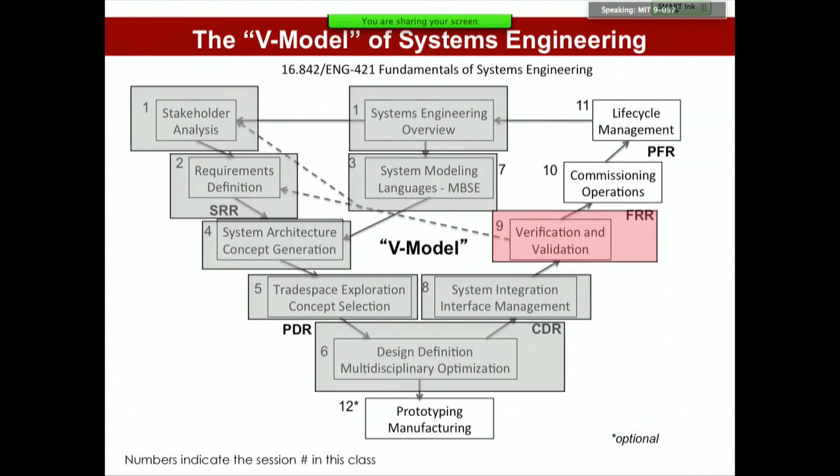And today's topic is V&V, verification and validation. I also want to discuss the FRR as one of the key milestones, the flight readiness review. And if you're not building something that flies, this is sort of your launch to market review. Are you ready to launch your project or product to market?

The outline is we have quite a few things to cover. First of all, I want to drill into verification and validation. What's the difference? What is their role? What's their position in the life cycle? And then we'll spend quite a bit of time on the issue of testing. What kind of testing is done? Why is it done? We'll talk about aircraft testing, flight testing, spacecraft testing, but also some caveats. Testing is not always free of challenges and difficulties.

Then I want to talk about technical risk management, which is often covered in classes on project management, but I think it's essential here as well, as a system engineer, to have a good grasp on technical risk management. So I'll cover the risk matrix, the iron triangle: cost, schedule, scope, and risk. And then I added a small section on system safety, which is a very important topic as well. And we'll finish up with discussing the FRR, the Flight Readiness Review.

So the readings related to this lecture are sections 5.3 and 5.4 in the System Engineering Handbook. And then there's a couple of appendices there, Appendix E and I, that are very, very helpful, and at least one of these I'll mention in the lecture. Plus one of the papers - this is a paper about a decade old, and I know a lot of work has been done on this since then - but this is a paper by Professor Nancy Leveson, who's a colleague of mine here at MIT, who's really an expert in system safety. So the system safety model that she's developed is the subject of that paper.

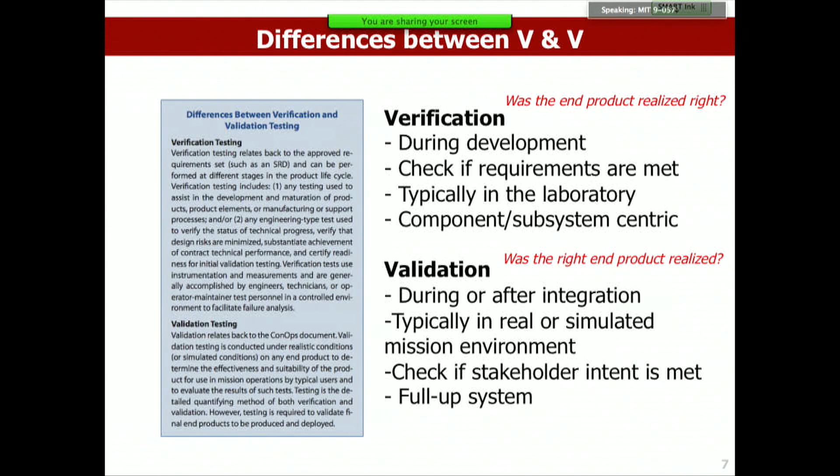So this is something I pulled out from the handbook, which is the differences between verification and validation, and I'm just summarizing this here. So one way to ask is, was the end product realized right? Meaning, did you implement it correctly? So verification is often done during development. So you verify components, subsystems, you check if the requirements are met. Typically, verification is done in a laboratory environment or on a test stand, or some environment that allows you to very carefully control the test conditions. And verification tends to be component and subsystem centric.

And then validation is the question, was the right end product realized? Did you actually build the right thing? Did you deploy the right solution? Validation focuses more on during or after system integration. It's typically done in a real or simulated mission environment. You check if your stakeholder intent is met, and it's often done using the full-up system. It's difficult to do validation on a subsystem basis alone. Typically, validation implies you've got to use the whole system to do it.

Or you basically use dummy subsystems. You replace the actual subsystems you're going to have with something temporary so that you can go back to the stakeholder and give them as close to the real experience as they'll have with the actual system. Okay, so that's essentially the distinction here.

So I want to do a quick concept question on this to see whether this distinction came across. So here's a link, SE9VV, these are all caps. And what I'm listing here is different types of test activities. And I'd like you to check the box whether you think this is verification, whether this is validation, or you're not sure. All right, testing and handling of a new car in snow conditions in Alaska. 90% of you said this is validation, and I would agree with this.

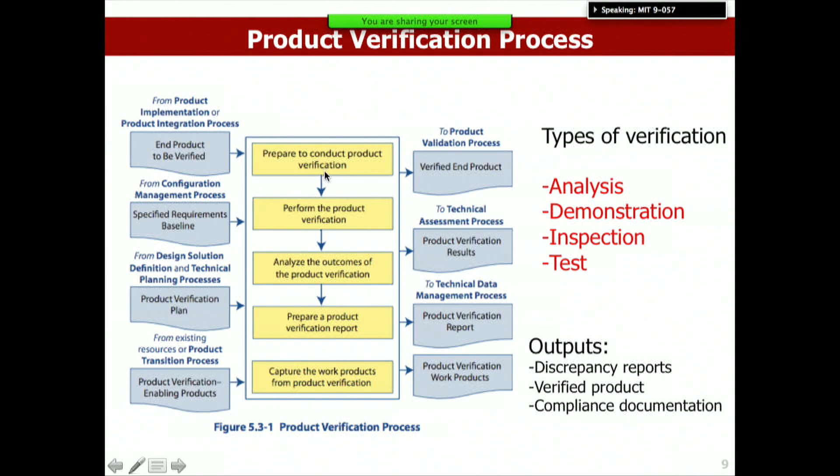So let me just give you a quick example here from my own experience about this verified end product. One of the things on the Swiss F-18 program that we did is not just buy airplanes and equipment, but also models of the airplane itself. In particular, finite element models, very detailed finite element models of the structure. And these models were very expensive. Like some of these models were millions of dollars.

And so I got a phone call. I was a liaison engineer at the time in St. Louis. I got a phone call from Switzerland saying, this is crazy. How can we be charged millions of dollars for this particular set of models? And I said, yeah, that seems pretty expensive. So I'm going to go negotiate this. And so I started negotiating, and I guess either I'm a bad negotiator or it was really, really clear why these were so expensive.

The reason these models were so expensive is because they were on the right side, not on the left side. So every one of these models that we were purchasing had been verified using actual physical tests. So every location was guaranteed under the load conditions to produce a stress and strain prediction at that location that was guaranteed to be correct within plus or minus 5%.

So the model had been very carefully calibrated and tuned against physical reality, as opposed to a finite element model that's just, anybody can make a model and put some load cases and boundary conditions on, and you don't know how closely does this mirror. So there's a huge difference in value between a model that has gone through verification, where at the end of it, there's actually a report, there's a protocol, there's data that says all these requirements that you had against it have actually been checked. This is a certified product.

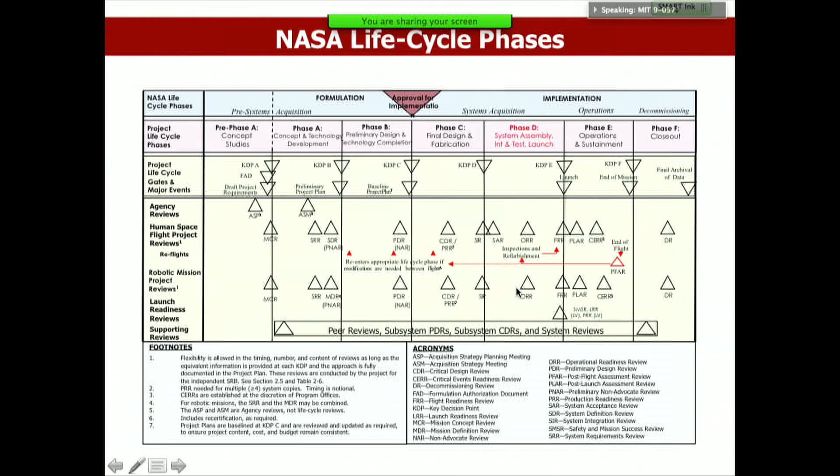Okay, so in terms of the life cycle phases, where this fits in, most of this activity happens during phase D. You remember this was the NASA life cycle model, and phase D is system assembly, integration, test, and launch. So much of the testing that we talked about happens during phase D. The system has been fully designed, it's been assembled, it's been integrated the way we talked about last week, and now you're really putting this system through its paces.

And so phase D is intense, it's expensive, and if something goes wrong, it sort of sends you back to the drawing board often, and you have to figure out whether a failed test, a failed verification, is a showstopper, right? If it is, then you have to redesign the system, you have to retest.

But if it's a minor thing, then you might be able to request a waiver, and you can say, okay, we didn't achieve this requirement, or we failed this test, but we think it's a minor issue, and instead of holding up the program, we're going to get a waiver for it, which means you get an exemption essentially, and you can move on. And whether or not a waiver can be granted is a big deal, and that goes under risk management, which we'll talk about in a few minutes.

Yes? I have a question. If you're a system integrator and you created some statements of work for other people to, say, procure a large optic, they go and build that mirror to your requirements, do all their verification and testing, and provide all that documentation. And from my experience with procurements, that comes back in-house, and you go to assemble it, and you essentially do a lot of that verification and testing again to double check that supplier.

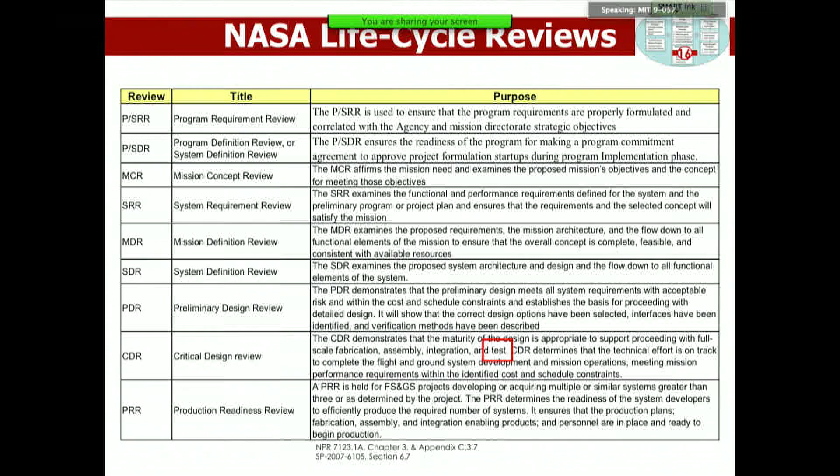Okay, so what I did here is search for the word test in the list of milestones. The first time it really comes up in a major fashion is at the CDR. The CDR demonstrates the maturity of the design and is appropriate to support proceeding with full-scale fabrication, assembly, integration, and test. So even though at the CDR you're blessing the final design, you should say something about how the testing will be done. In fact, test planning often is way before the CDR, but at the CDR you should really talk about the testing.

Then we have a so-called TRR, which is a test readiness review. For each major test, you would have a separate TRR. The TRR ensures that the test article, hardware, software, the facilities, the support personnel, and the test procedures are ready for testing, data acquisition, reduction, meaning data post-processing, and control.

And then at the system acceptance review, the SAR, that's when you essentially transfer the ownership of the asset, right? And it's at the SAR that you're going to review not just the product and its documentation, but all the test data and the analyses that support verification.

So at CDR, you say this is the testing we'll do. At the test review itself, you say everything is ready for the tests to happen, and then you do them. And at the system acceptance review, you look backwards and you say what tests actually happened, what's the documentation, what were the results. Are we ready to own the asset now? Does that make sense? Okay.

Okay, so with that in mind, let's talk about testing itself, what kind of testing there are. Testing is one of the 4 methods of verification, and it's the one that we often spend the most money on. So this is from the handbook, section 5.3. This is basically an alphabetic list of the kind of testing that we typically do. I'll just highlight a few here, and then I have a group exercise for you.

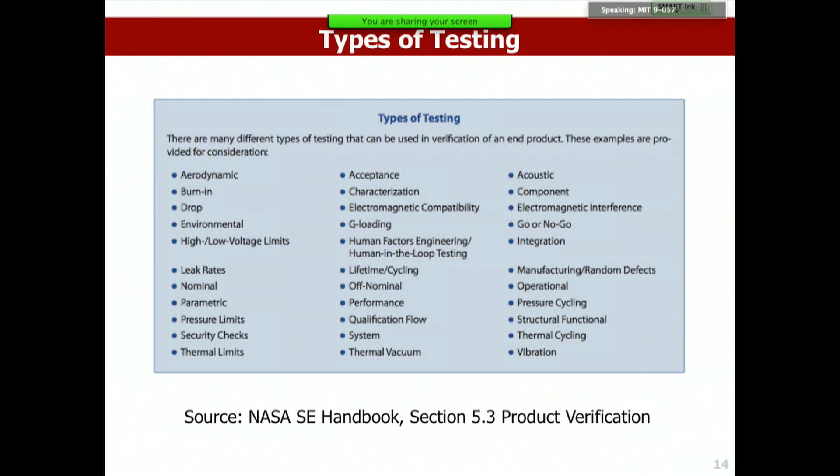So this is 20 or 30 types of testing, and then within each there's even subtypes. There's a whole industry actually that is primarily focused on providing test equipment, sensors, data logging equipment. It's a big industry, not just in aerospace, but throughout.

Okay, so I'd like to do a little turn to your partner exercise, and the question is, what kind of testing have you been involved in the past? If this was in product design, product development, that's fine. If it was for an internship, or even at the university itself, if you did some experimental testing as part of research, that's fine too. You can talk about that too.

So what kind of testing have you been involved in the past? What was the purpose of the testing? What were the challenges? What went well? What were the results? Maybe if it didn't go well, talk about that too. All right, good. So we're going to go back and forth. Who wants to start here at MIT? Who has a good story to tell?

Go ahead. So I worked on the ground station side of the Lunar Laser Communication Demonstration Program that recently flew. I was involved in assembly and integration, but also doing verification testing in the lab and at our field site. Then we did validation when we moved out to the field site in New Mexico. So I was involved in the whole process, and it's neat to see. We had to go into the clean room a few times to adjust the optics because we saw that they weren't meeting requirements.

Is there the reflector that was left by the astronauts? Are you using the reflector that was left on the surface? No, we were using just Zygo, optical alignment stuff in the lab. And then when we were out at the field site, we were utilizing guide stars to align the optics. So what went well? Was there a big difference between indoor and outdoor? What surprised you in these tests?

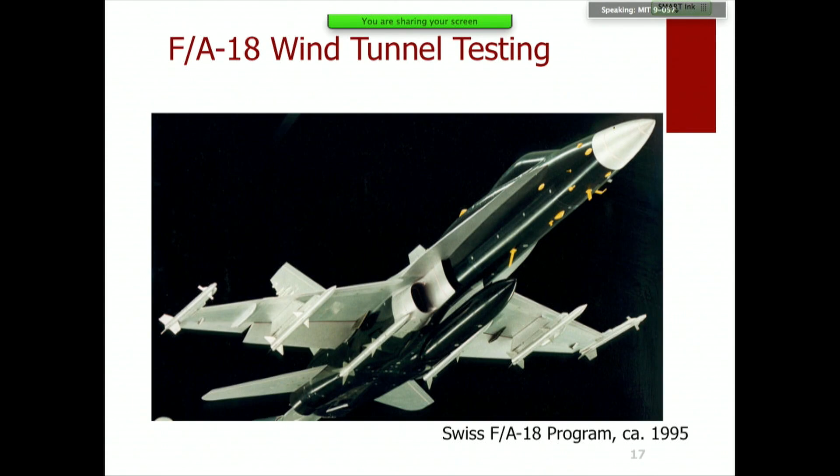This is a wind tunnel test model. This is a model that was developed as part of the F-18 program. This is about 1995 vintage. It's a subsonic wind tunnel model, and you can see in yellow you have all these probes and radomes and things like this. So it's basically to check whether any modifications you make to the airplane will affect its performance in airflow. This model, by the way, just building this model is about $500,000. It's very accurate, it's very precise.

Yes, go ahead. Is that model full scale or half scale? No, it's, I want to say like 1/8 scale, something like this, yeah.

Okay, here's the hush house that I was talking about. This is in St. Louis. So you can see that the airplane is not painted yet, and only one engine at a time. So the engine is, in this case, at full afterburner. You can see the airplane itself is secured with these chocks here, and there's load cells in these chocks. So as you fire up the engine, you can measure the thrust by the load cells that are attached to these

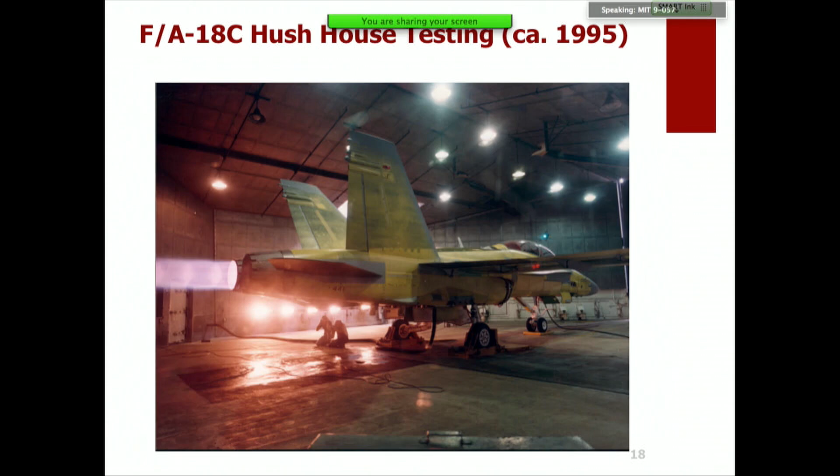chocks here. You also see that there's these cables running in and out of the airplane for all the sensors, and the engine is put through its full different operating profiles, and a lot of sensor data is recorded to make sure that the engine responds appropriately. It has the right thrust for the right throttle setting, the fuel consumption, all the temperatures in the engine, that everything is nominal, essentially.

You have to reserve months and sometimes years ahead. If you want to do a live fire test campaign, you have to reserve the range at least 18 months to 2 years ahead of time, because a lot of other services, a lot of other programs are using the same facilities.

In Europe it's a little harder, definitely in Switzerland, because the country is so small and dense and highly populated. You can't test live missiles in Switzerland. You can do guns, air to ground, but in order to do missile testing, that's typically done here in the US or in a more limited fashion in Scandinavia, like in northern Sweden, where there are some test ranges.

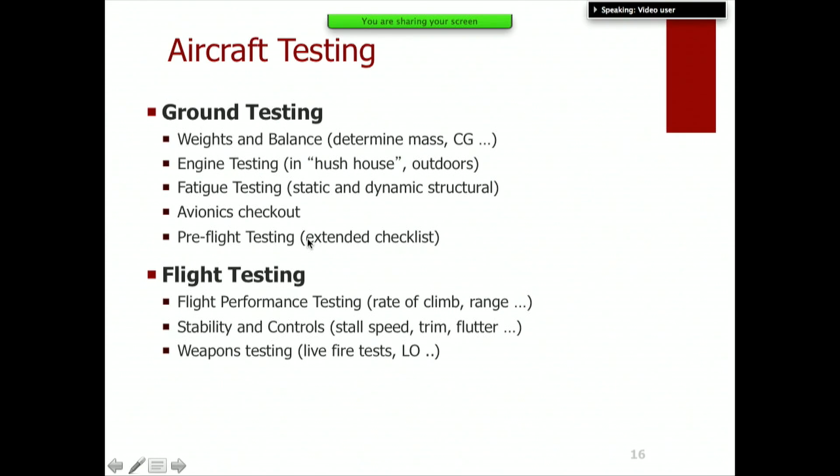So that's where this ground testing, pre-flight testing becomes very important. So basically you taxi for many hours, all the flight control surfaces, all the engine, the hush house testing. So you essentially try to do as much as you can on the ground before you do the maiden flight. All right, let's move to spacecraft.

And it's kind of a similar thing. You can distinguish the ground testing versus on-orbit testing. So the ground testing is really not that different. Weights and balance. The biggest thing is if your satellite is heavier than the launch capability of the launcher, you have a real problem. So the mass constraint is even tighter in spacecraft.

Then a lot of testing on antenna and communications. This is typically done in anechoic chambers in the near field, and then later in the far field. Vibration testing, that's the shake part. Thermal and vacuum chamber testing, that's the bake part. And then you also have pre-launch testing, so off-pad and on-pad.

Off-pad testing is the satellite or the spacecraft has already been shipped to the launch site, and it's hooked up, like a patient in the hospital, to a lot of cables and power and cooling and so forth. And then when it's on the pad, it's pretty limited. So on the pad means the satellite or the spacecraft is already integrated into the launch vehicle. It's on the launch pad, and then the amount of testing you can do is very limited.

So off-pad, on-pad is: has the spacecraft already been integrated on the launcher or not? Once you launch to orbit, you got your 8 minutes of terror, and hopefully the launch goes well and the spacecraft is released into its initial target orbit. And then you do a lot of other tests like thruster testing. Can you do station keeping? Can you turn on and off the thrusters? You deploy all of your mechanisms, your antennas, your scientific instruments, and then your communication and instruments.

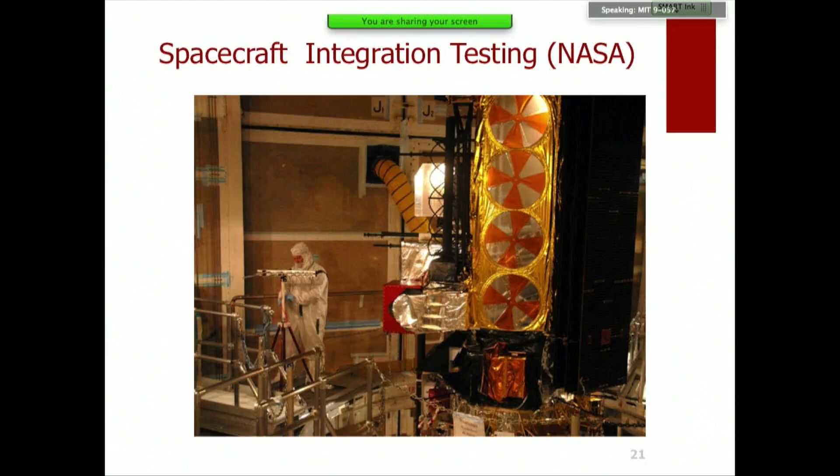Some pictures. So this is what typical spacecraft integration testing looks like. So this is in a clean room environment. You have people in bunny suits, and the idea is to not damage the spacecraft while you're doing the testing. This is a picture of the Clementine spacecraft.

This is one of the failure modes, is that you have high electrostatic charges that build up on a spacecraft, create a large voltage potential across the spacecraft. Some spacecraft have failed because of that. So all of these things you want to test in a very controlled environment.

James Webb Space Telescope. I'll send you a link through email. There's a simulation of this on-orbit deployment. It truly is amazing. This spacecraft will be launched in a box essentially, and the deployment sequence is very carefully choreographed. First, typically, you deploy your solar panels, right?

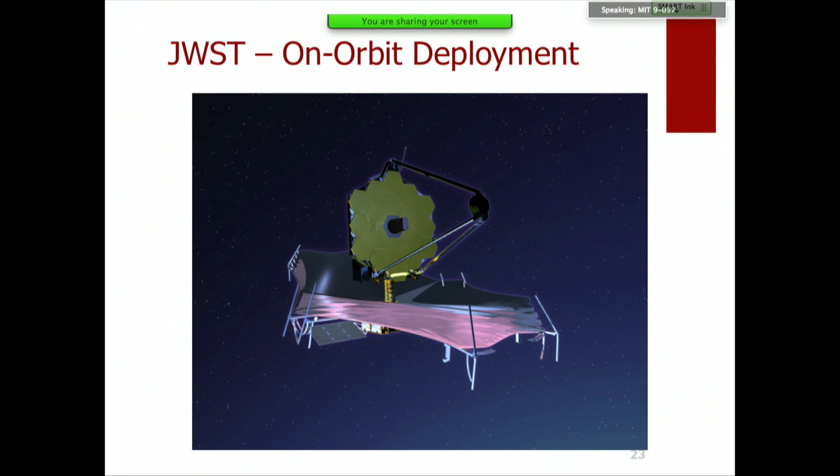Because you need power, because you're only running on battery initially. So if your battery runs out before you've had a chance to deploy your solar panels and get fresh power into it, you're in big trouble. So typically solar panels first, then communications, and then you start deploying the other subsystems.

So for James Webb, also very tricky is this, it's called the sun shield. It's essentially thin layers of insulation, and the geometry is very important. The primary mirror, the secondary mirror, all these things need to be deployed with very, very high precision. And it's even to the point where this particular spacecraft is so lightweight that it cannot support its own weight in a 1G gravity field.

So there's no way to test end-to-end the full deployment sequence on Earth. The first time it will happen is in orbit. Now, they've tested subsequences or scaled models. For example, the Sun Shield has actually been deployed at a smaller scale in a 1G field, but never the full thing. So this will be kind of scary after an $8 billion investment. Let's hope for the best, 2018.

Testing is good, but testing also has its caveats. Caveat means limitations, essentially. Testing is critical, but it's very expensive. Think about test rigs, test chambers, sensors, DAQ as data acquisition equipment. All this stuff is very expensive. And if you can reuse things between different programs, that helps, but still.

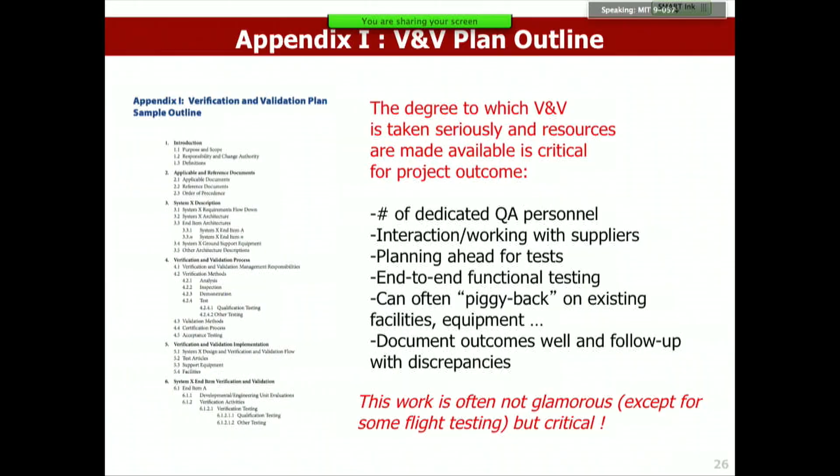It's not really a question, but I wanted to say that also flight testing is not so fancy. I mean, many people think it is, but it's actually a lot more. Well, the actual flight, maybe it's fun, but there are not that many. You need to prepare them weeks and weeks ahead. And it's actually very, very boring because you need to make sure that you don't waste time at all. At least you can waste a little bit more time in a lab. So it's very stressing and not so funny.

Do you have experience with this? I wasn't flying because you need to be certified, but I was preparing some, and I think it's even worse than testing in the lab. Yeah, yeah. Which airplane or which system were you involved with? A330. I was in there with the power plant system. Okay. FADEC in particular, and the aircraft was an A330.

A330. Okay. Great. But you know, I think it's healthy to have this experience. It really makes you humble. And you also see, for the things in design, did you design well? Did you design for testability? I highly recommend for every one of you to try to get on some kind of test campaign at least once in your career because it's eye-opening. So thank you for that comment.

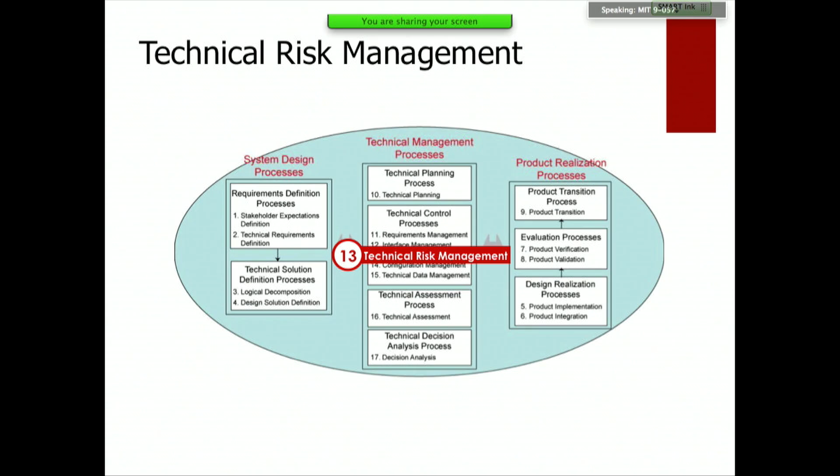So let me talk about risk management. This is actually quite prominent in the Systems Engineering Handbook. It's right in the middle of your systems engineering engine, Technical Risk Management, Section 13. Why is it important? First of all, what is risk? Risk is the probability that a program or project will experience some undesired effect or event, and the consequences, impact, or severity of that undesired event should it occur.

So think of risk as the product of probability times impact. And the undesired events could come from a number of things: technical, programmatic, so cost overruns, schedule slippage, safety mishaps, health problems, malicious activities, right?

Cybersecurity is a big thing these days, environmental impact, failure to achieve the scientific or technological objectives or success criteria. And so technical risk management is therefore an organized, systematic, risk-informed activity centered around decision-making to proactively identify, analyze, plan, track, control, communicate risks, and to increase the likelihood of success of a program.

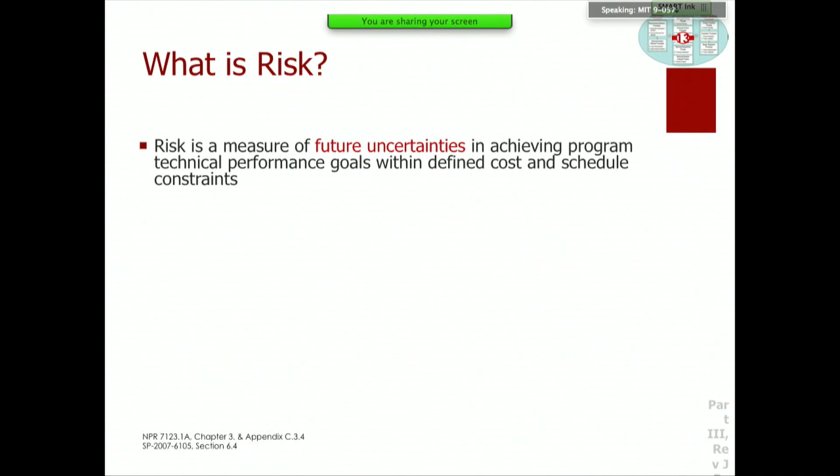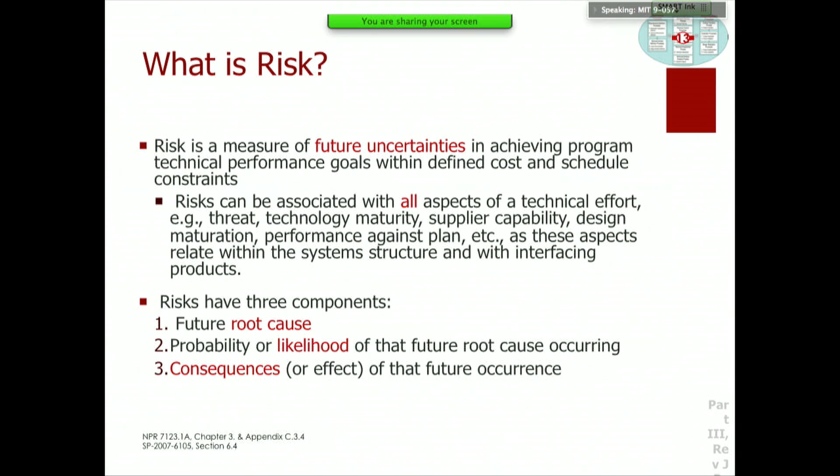And so what risk really does is measure the future uncertainties of achieving your goals, your program goals, technical, cost, schedule goals, and think of risks in a sort of holistic way, all aspects of the technical effort, technology maturity, supplier capabilities, performing against plan, and so forth. And so the idea of risks is that risks have some root cause, there's something that gives rise to risks, and then the actual quantification of risks happens in terms of likelihood and consequences, which are kept separate dimensions.

So the first thing to think about is, where do risks come from, right? Where's the source of risks? And I want to show you a couple of models for thinking about this. The first one is this idea of layers of risk. And I want to credit one of my colleagues here at MIT, Don Lessard from the Sloan School, who really developed this layer of risk model and applied it to different industries. So there's a version of this for the oil and gas industry. You could make a version for medical technologies. So this is the version for Mars missions.

Okay, so if you're designing a new Mars mission, a new Mars rover. So you have in the bullseye here, the narrow interpretation is technical or project risk. So the airbag technology, if you're using airbags for deployment, will it work? The rover motor performance, are you going to have software bugs? Those are the risks we typically think about. And the idea is you have high influence over these risks as a system engineer, as a project manager.

Then you have a layer around it, which we call industry or competitive risks. Will your contractors perform? Will you have budget stability? And then there's more country and fiscal risks. So in the US, we have a budget cycle. We have 4-year administrations. Will you get your budget? What are the priorities between human and robotic space exploration, and then working with international partners?

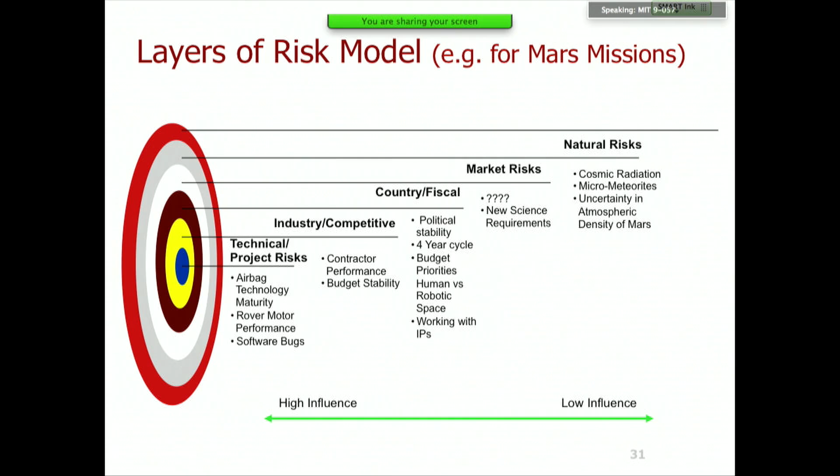And then finally, the most outer risk is what we call natural risk. So this would be things like cosmic radiation, micrometeorites, uncertainties in the atmospheric density of Mars as you're doing entry, descent, and landing. And you have very low influence, right? That doesn't mean you can't protect yourself or take measures to deal with these risks, but fundamentally the occurrence or the probability is something you can't really do much about. So that's one way to think about risks, and the seeds of risks are in these layers. I know this is very high level, but I find this to be a pretty useful model. Yeah, go ahead.

So this just references the influence you have, not necessarily the amount that each of these are a risk to the program? That's correct. That will be program specific. The stuff that's in the bullseye here, you can do a lot about it, perhaps both in terms of probability and impact. And then as you move further out, there's less and less influence you have as a system engineer, as a project manager.

Here's another way to organize your thinking around risks, and this is around the iron triangle in project management. We talk about the iron triangle of cost, schedule, and scope, and we call it iron because the idea is that if you constrain all three too tightly, it can be very difficult. And it's also referred to as the triple constraint in project management. So the three dimensions here are technical risks, cost risks, and schedule risk.

And then in the center we have programmatic risk, which means it's kind of the combination of all three, and the idea that even if you do a great job on keeping your budget under control, schedule, and you're meeting your technical objectives, you can still fail because the program as a whole isn't doing the right thing, or the market that you had been targeting is no longer really attractive by the time you launch.

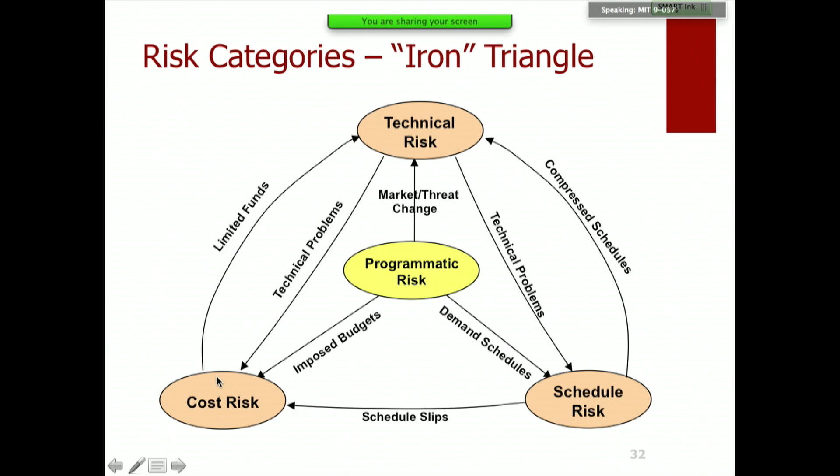The key idea here is that these risk categories are not independent of each other. So let me mention a couple of examples. So cost risk might limit your funds, and that could in itself induce technical problems, which cause you further cost risk. So one of the big initiatives at NASA in the 90s was the Faster, Better, Cheaper program, right? We're going to launch more missions, cheaper, and out of 10 missions, maybe 2 or 3 will fail, and then 7 will succeed, but we'll get more value out of this as a portfolio.

Unfortunately, it didn't work very well because when the 1, 2, or 3 missions fail out of your portfolio, the media and the public focuses on the failures rather than the aggregate value of the whole portfolio. And eventually, that's probably the main reason why Faster, Better, Cheaper was abandoned. But so for example, we just talked about testing. If you have a very limited budget, what is the first thing people typically cut out? What's the first thing to go? Testing. Testing is very important.

Sam asked me during the break, what's your typical budget for testing and V&V activities? And in many programs, it's very substantial. Maybe 30, 40% of the budget, easily. And so you start cutting out tests. Well, what you do is you introduce technical risk. And if you have failures because you didn't test, that could cause you additional rework and more cost.

Similarly, schedule slips can induce cost risk. So as you slow down, you have what's known as the standing army cost, right? People are going to charge to your program even if it's at a reduced level. And that will also increase your cost. So lots of coupling here between risk categories.

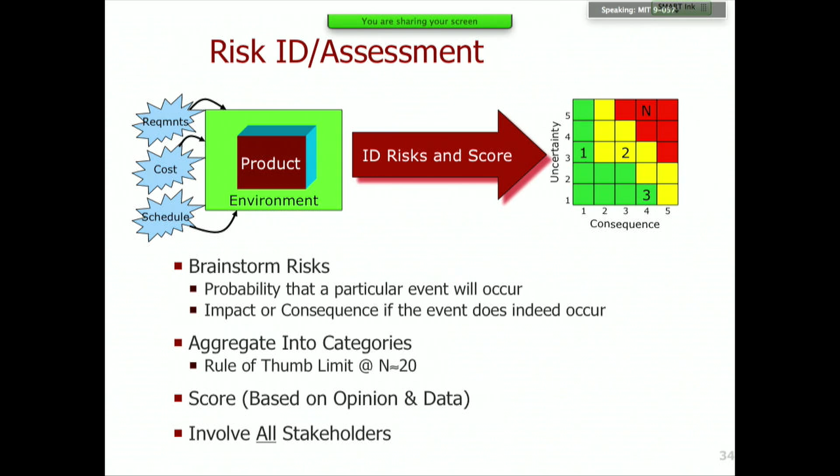And this is where actually having a mix of younger engineers and more experienced engineers really comes in handy. The experienced engineers, they will have been through several programs. They will have seen failures in the past. They will really be able to point to potential risks that less experienced people may ignore or just not understand how important they could be. So the next step then is to aggregate these into categories, typically not more than 20 or so categories or risk items.

Projects often keep so-called risk registers, which is just a database or a list of risks. If you have hundreds and hundreds of risks in the risk register, it's too much. It's just a long list, and it's just a check the box exercise. To really take risk management seriously, you have to focus on few of the risks that you think are important. You score them based on a combination of opinions and data, and you try to involve all the stakeholders in the risk management. And eventually, risks are placed on this matrix of uncertainty and consequence.

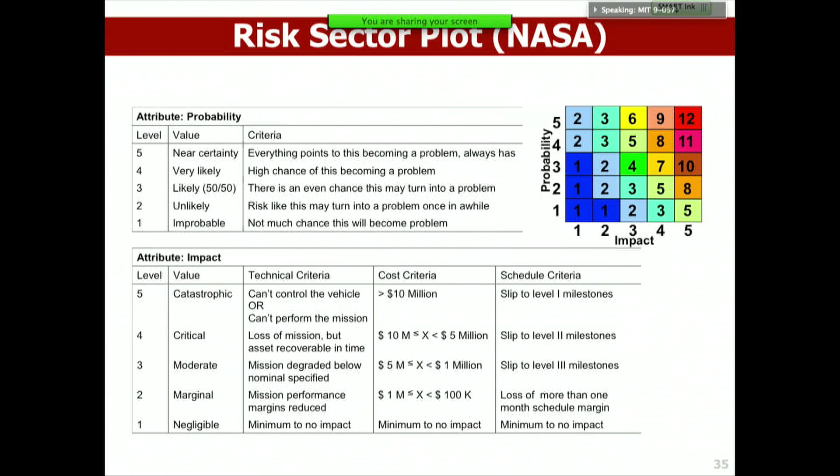And then schedule. So a level 1 milestone would, for example, be launch, right? A good example of this was the Mars Science Laboratory, the Curiosity mission. Originally, it was supposed to launch in 2009. They missed that deadline mainly due to problems with cryogenic actuators. The actuators took a lot of the blame, but there were a lot of problems across the board. They missed that launch window, and they had to launch in 2011. So that was considered, from a programmatic standpoint, a level 5 failure because you missed your main launch window, and you had to wait 26 months for the next one.

So that's good because now, when you assign a probability and impact, you can really look at these criteria, and it's easier to do that in a sort of repeatable fashion. The other thing is, if you look at the colors on the matrix, you can see it goes from 1, blue, which means low risk, to 12, which is the highest risk. So there's 12 risk levels. But when you look at the matrix, there's something peculiar about it. So look closely at the colors, and you'll see something special about this matrix. Anybody notice what I'm talking about? Let's see at EPFL. Do you guys, when you look at those colors at the matrix, do you notice something?

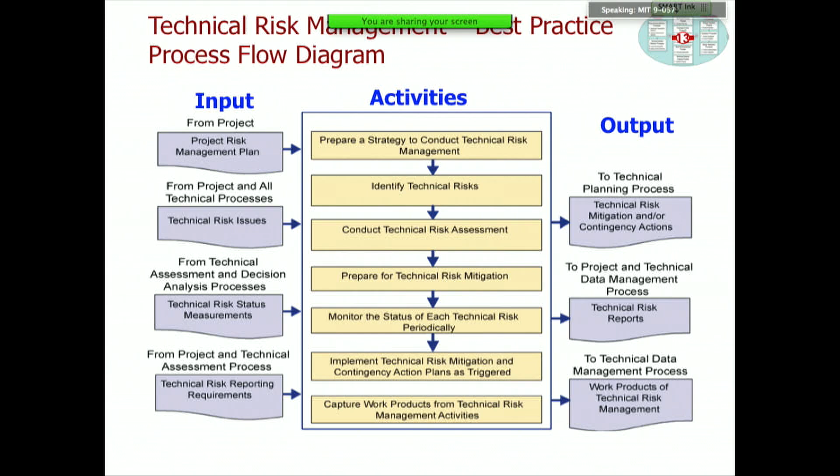This is again a flow diagram for how to do this risk management properly. You have a risk management plan, your technical risk issues that are placed on the matrix, any measurements or data you have, and then how do you report this, and then out of it comes a mitigation plan, a set of actions, technical risk reports, and then any work products from the technical risk management. And the idea is that you repeat this process on a regular basis. And it's a big part of your milestone reviews as well.

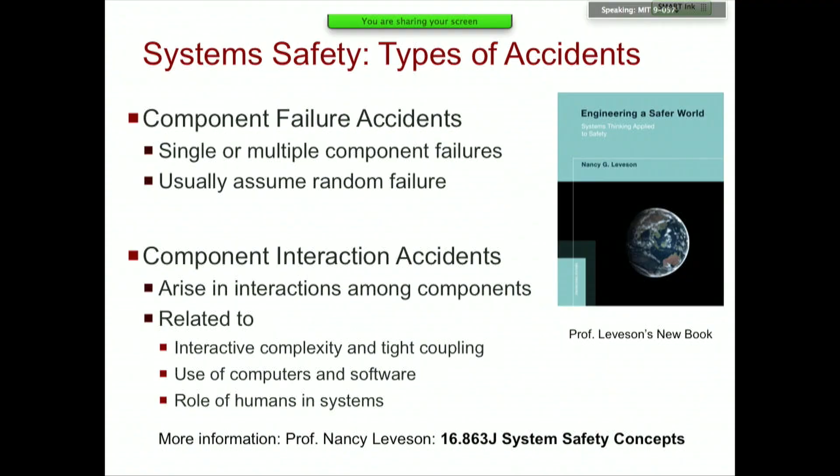Okay, so I'd like to spend a few minutes on system safety. I am not going to do this justice because there's a whole class here at MIT on this taught by Professor Nancy Leveson. By the way, who's taken that class or been thinking about taking it? About 3 or 4 of you. So I'm just going to give you a very quick exposure to this.

This is a book that Professor Leveson wrote several years ago, and she basically distinguishes two kinds of failures. Component failures, which most people think about, an axle broke, or the battery caught fire. Clearly component failures are real and they happen, single or multiple component failures, and usually there's some randomness to them. So most of the classic accident investigation techniques and safety techniques focus on component failures.

But there's also component interaction accidents or failures, which are trickier in a sense because you could have a system where no single component has failed, and yet you had a system failure. So it's the interactions among components. And this could be related to interactive complexity and coupling, more and more computers and software, and then the role of humans in systems. This is really what a lot of this is about.

So the traditional safety thinking is that you only need to worry about component failures, right? Here's a classic example of a sequence of events. This is for a tank failure. So in this case, we have a tank, and there's...

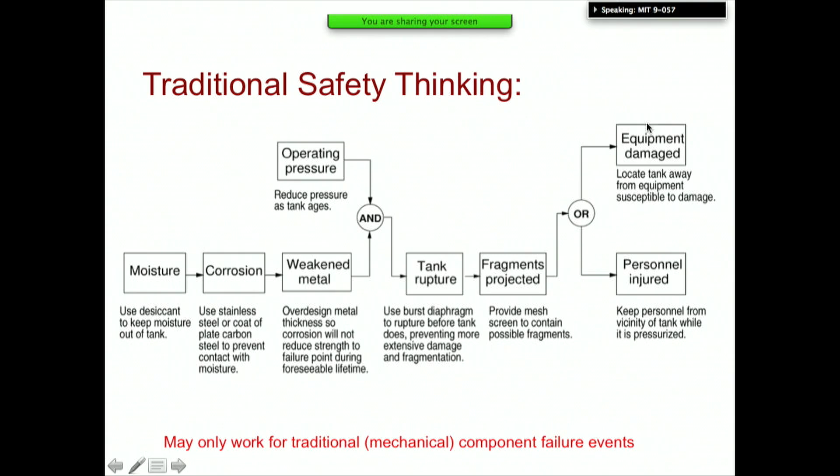moisture that builds up in the tank, and then corrosion essentially is a result. The metal gets weakened, and under the operating pressure of the tank, the tank itself has been weakened due to corrosion. The operating pressure causes a tank rupture, and the tank rupture then causes essentially an explosion, and fragments or shrapnel from the tank will be projected and then cause equipment damage or personnel injury.

And so in this kind of linear chain of events model, the way you think about safety is putting in barriers. This is often also referred to as the Swiss cheese model, right?

If you take layers of Swiss cheese, and I guess it has to be Emmentaler, right? You guys know the Emmentaler at EPFL, right? Emmentaler is the one with the big holes. So you take these slices of cheese, and if you look at the cheese and there's actually a hole right through, then the accident can happen. But if you put another barrier in between, you can't see through the cheese and the accident is prevented.

That's sort of the classical thinking around system safety: chain of events, and then put barriers between these. This is, I think, valid for a very particular kind of accident, which are these component accidents.

What Professor Leveson says in her STAMP and STPA framework is a little different. This is based on essentially thinking about safety as a lack of control of a system, lack of controllability of a system. And so if you think about it this way, I'm showing you here a control loop, and you have the actual system, the actual process that you're executing. The controlled process is here. You're sensing things about that process, like temperature, pressure, proper alignment.

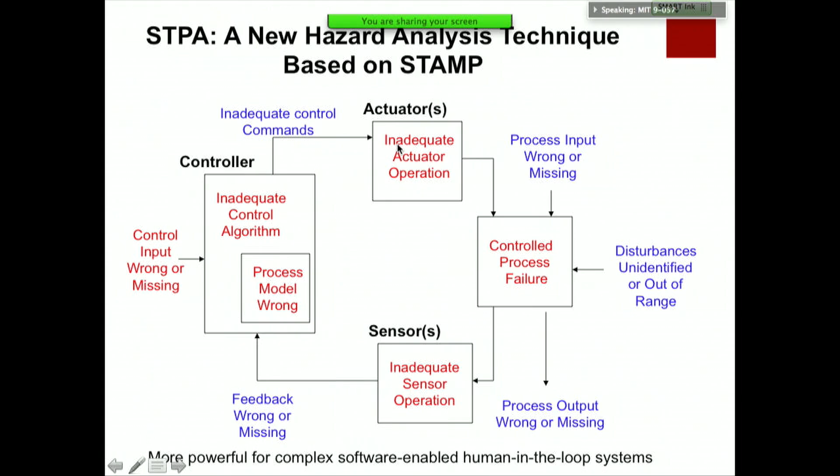And so one problem could be your sensors are inadequate, you're sensing the wrong information. And then here's your controller model: how should you control the system? So you have the wrong controller or the wrong process model. And then here's your actuators: are you issuing commands at the right time? Are you issuing the right commands, or are you not issuing commands when you should be to the system?

And that feeds back into the control process itself. Process inputs could be wrong or missing. You could have disturbances into the process that are unidentified or out of range. And then eventually, if this process goes unstable, then you have a failure or an accident. So it's quite different. It's essentially thinking of this as a control problem instead of a chain of events problem.

And the argument here is that for safety or failures that involve a combination of hardware, software, and humans, often this model is able to be more complete in terms of identifying hazards and potential mitigation actions.

So I think we're out of time, but I want to give this to you as homework for thinking about this. This is an accident that happened earlier this year, in October. This is the Virgin Galactic crash that happened. Virgin Galactic is one of the space tourism companies.

And during a test flight, the airplane crashed because the co-pilot unlocked the feather system. So it has a kind of feathering mechanism, and the co-pilot unlocked it too early during a kind of high-speed flight phase. And so what I'd like you to do, the link is here. Just read the story. There's a more lengthy accident report that's come out. I'd like you to just read this quickly and then think about, how does this relate to risks? How does it relate to this particular model of system safety?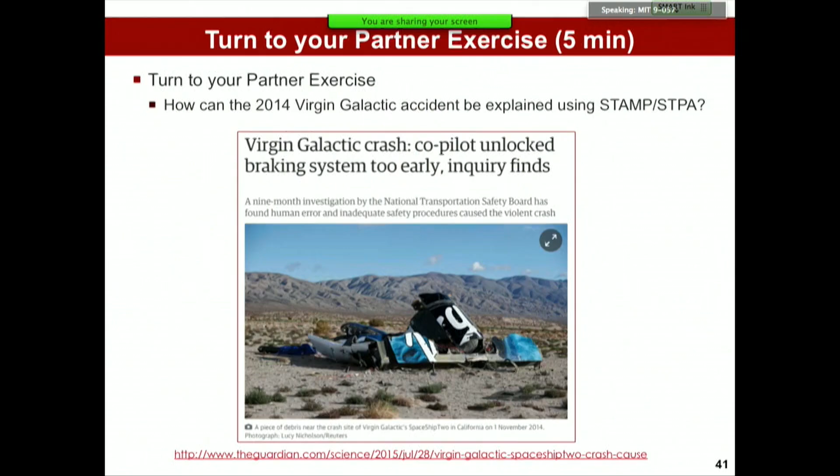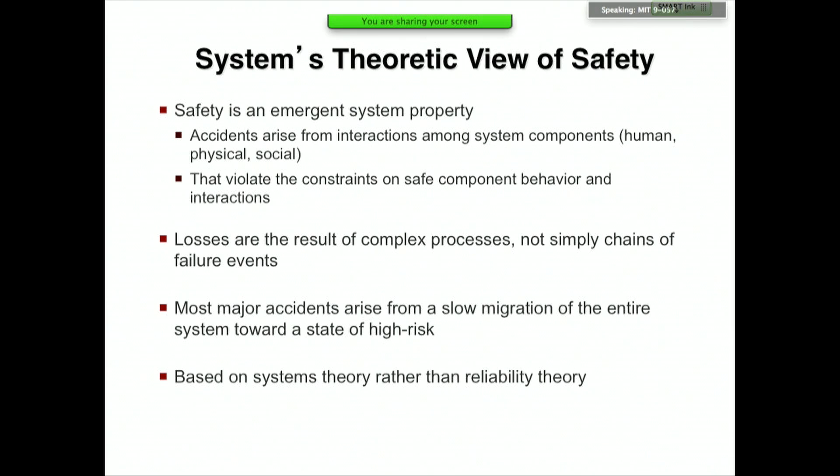Okay? So the systems theoretic view of safety is then that safety is an emergent system property. Accidents arise from interactions among system components, physical, human, social, constraint violation. Losses are the result of complex processes, not a simple chain of events, and most accidents arise from, you could have a system that's quite safe when you start operating it, but over time it migrates to an unsafe state because sensors fail, people start bypassing safety procedures, and gradually it migrates to high risk.

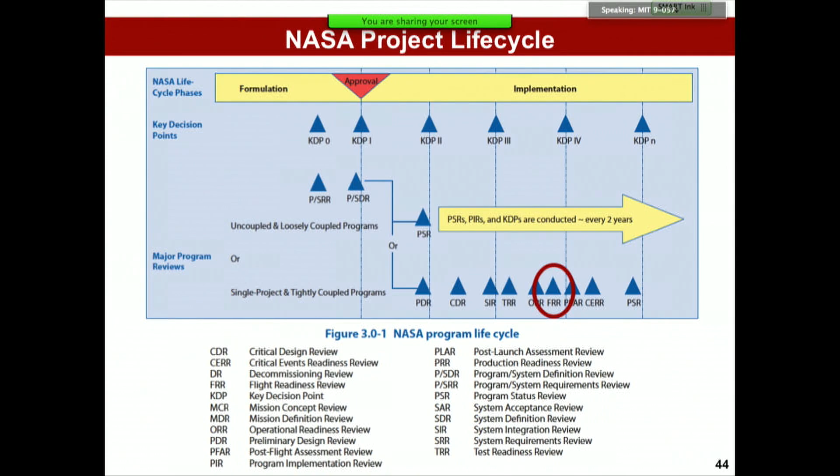Okay, so the last thing I want to talk about just for a minute or two is the FRR, the Flight Readiness Review, which is one of the later milestones. And what happens at the FRR? It's essentially your last chance to raise a red flag, right? This is the last milestone before launch. Have all the V&V activities been passed successfully? Are there any waivers that need to be granted? What are the residual risks we just talked about?

And then, after the FRR is passed, you actually start the countdown, right? T minus X days, Y hours, Z seconds to an actual launch or a product launch, whatever it is. And then here's from the handbook, the entrance and success criteria for FRR. So everything should have been done at this point. Your design, your integration, your testing, your operating procedure, your people should be trained, this is your last chance to raise a red flag. After the FRR, you essentially go for launch. So the stakes are high.

Okay, so quick summary. Verification and validation are critical. There's a distinction between the two, right? Verification is against the requirements as written. Validation is you go back to your customer and you test in a real environment. Testing, many different kinds of testing. It's fundamentally a QA activity, and it's really expensive, but it needs to be done right. Risk management, we have different tools like the risk matrix, risk identification, mitigation, and that's really where the rubber meets the road in terms of the tension between cost, scope, schedule, and risk in projects.

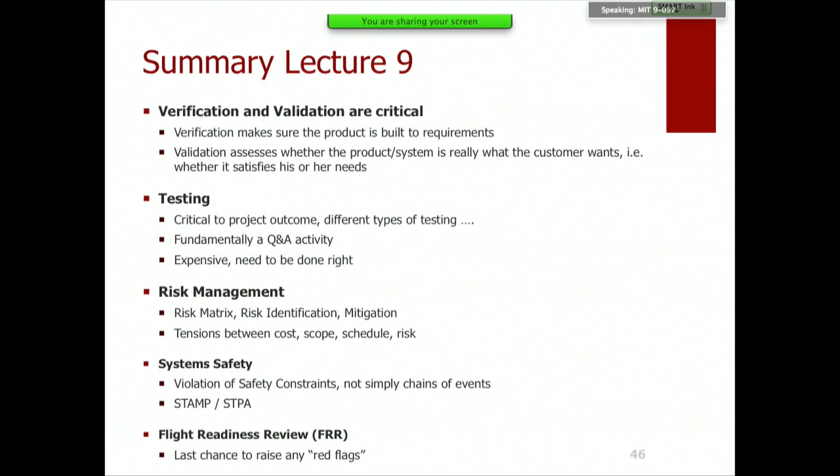EPFL? Yes, please go ahead. So after the FRR, you should have finished your tests, right? Yes, you should have finished your tests except for the ones that you're going to do, say, on orbit, right? Because I was wondering, in the list there is the go/no-go test, and I'm wondering if it's not related to the launch, actually. Yeah, so the actual launch countdown, you can stop the launch if certain things don't work, so this is a review. The FRR is more like a CDR, the countdown hasn't actually started yet, but if you successfully pass the FRR, that's when the official countdown starts. And then you still have a possibility, of course, of stopping the launch. But in terms of a formal programmatic review, this is your last chance.

I think the point here is more about what is your system boundary. If you consider the system boundary being the whole mission, including the launch, then obviously the system will only be finished when the mission is finished, phase E/F. Right. And this FRR, flight readiness review, is linked to the payload or to the whole satellite, specifically that you're allowed to go forward and now start the countdown, and then all the other things. Now, if you extend the mission boundaries to the whole space program or to the whole colonization of Mars, it will obviously be later.